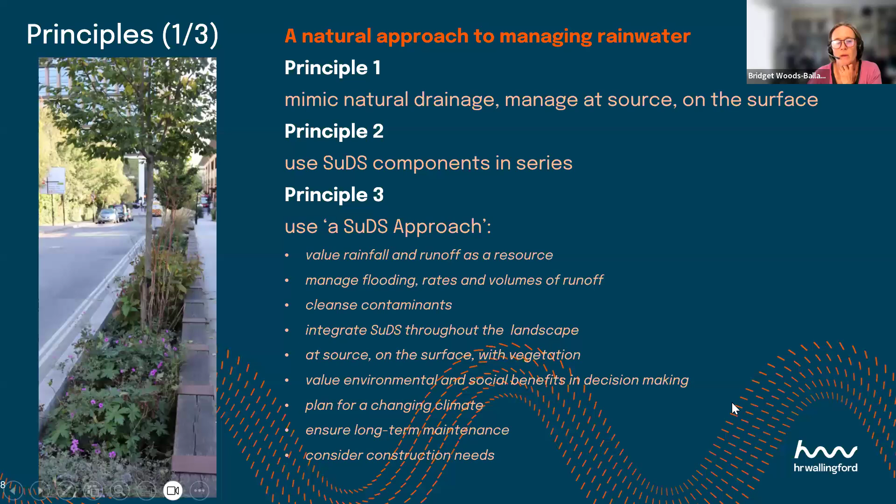The other further principles, again, they're quite overlapping, but ensuring surface water management is considered as early as possible in development design. It's integrated throughout the development and building design, that the scheme protects the environment, maximizes benefits. Again, all fairly similar. Making sure that you take account of existing flood risk policies.

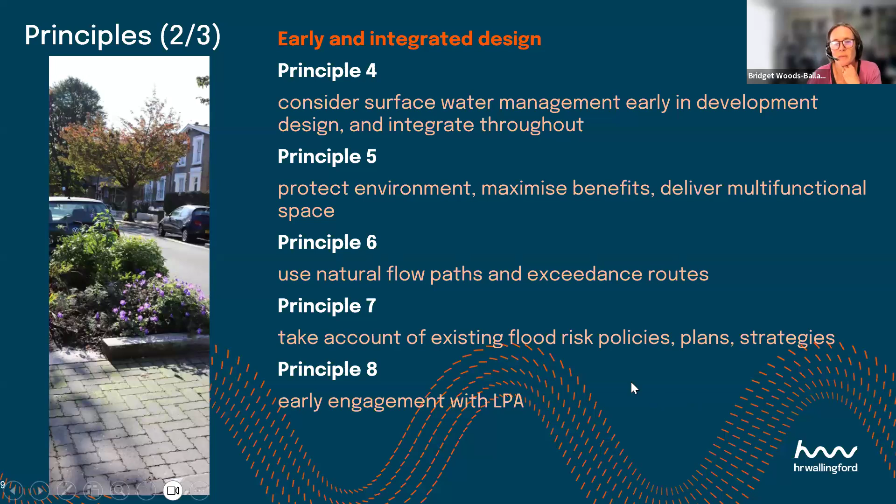So it's trying to get that integration between the flood risk assessment and flood risk management processes as part of development planning and the drainage and surface water management planning. And making sure that you demonstrate compliance as early as possible in the planning process, and then fully to secure planning approval.

So what are the standards? The first one is about runoff destinations, and prioritizing destinations that are going to ensure that you are valuing rainfall as far as possible. So the priority one, what you should consider first, is using the water wherever you can for non-potable use within buildings. Where that's not possible, or where you can't use it fully, then infiltration should be your next priority.

Then, if you are discharging off-site, you need to prioritise rivers, streams, lakes, other water bodies before you consider putting any runoff into an existing sewer. Because the recognition is that those sewers have a limited capacity, and that under climate change or urban growth, putting more water into the sewer is only going to add pressure and potentially cause flooding or pollution spills. And the combined sewer, which then has a risk of combined sewer overflows, is absolutely the lowest priority.

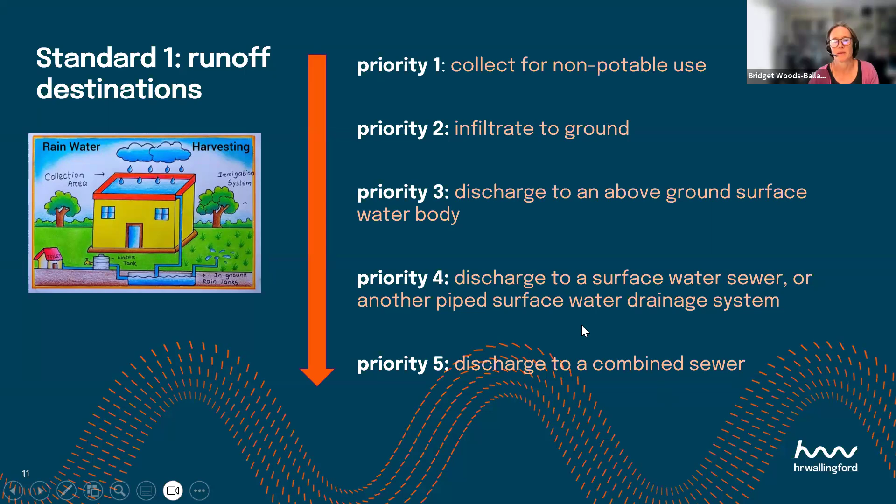Standard 2 is about managing everyday rainfall. Making sure that the first initial depth of rainfall is retained on the site. And I think this standard is going to be the standard that really drives the most fundamental change through SuDS delivery. It is only by putting in green or permeable surfaces on the site that you're going to be able to ensure that this initial depth of rainfall is retained.

An impervious surface draining to a pipe system and then into a tank is not going to deliver you this interception standard. And this graph just shows what we're really aiming for with interception. It shows two equivalent sites. The red line shows the response from a conventional drainage system, and the green line is the response from a SuDS drainage system.

So the blue lines are rainfall. So you've got probably 5-8 millimeters of rainfall happening before you get any runoff at all from your SuDS site, and it's very low volume and low flow rates. Conversely, the conventionally drained site, you'll get runoff immediately it rains, and that runoff will be peaky, will be high flow rates and high volumes, and that's what we're trying to avoid to make sure that we're not putting pressure

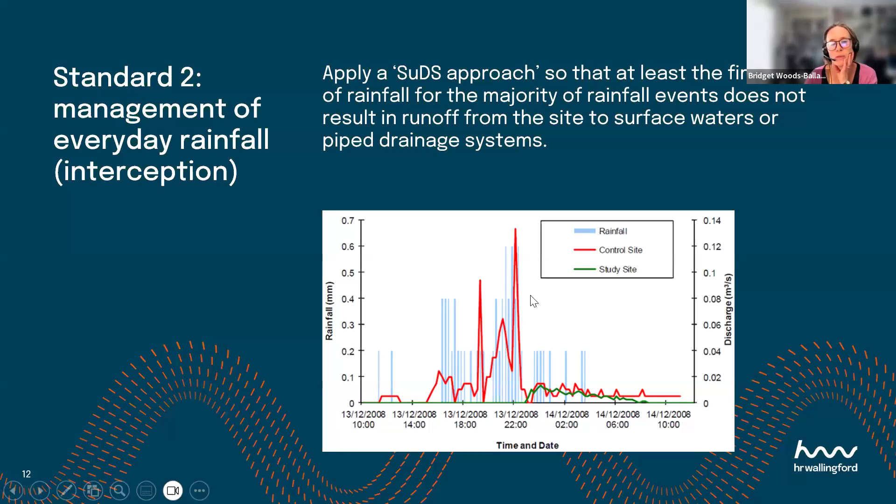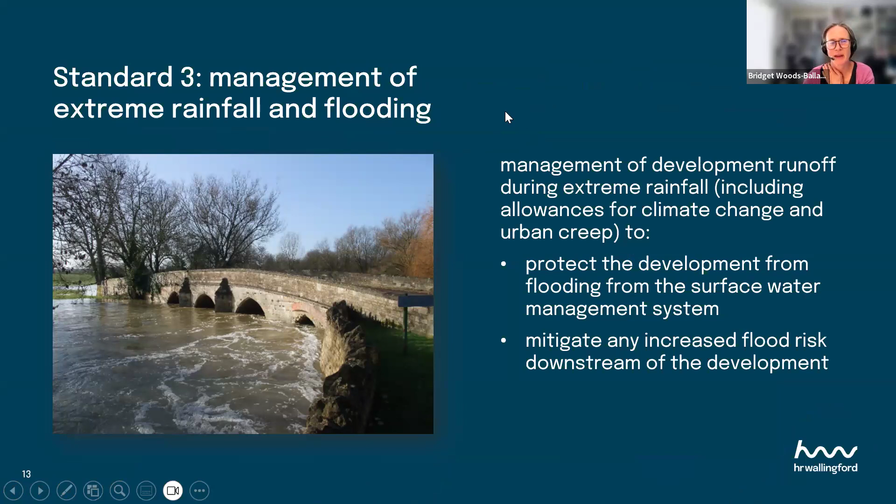on our watercourses. Standard 3 is about the standard hydraulics of managing extreme rainfall, making sure that you don't make things worse downstream, and making sure you adequately protect the properties on your development. So that really reflects the previous version of the non-statutory standards, with some small differences.

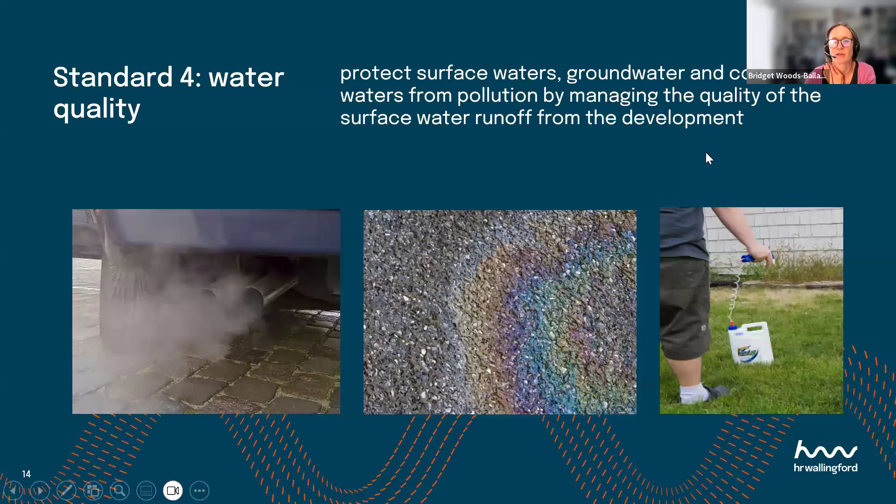Standard 4 is about managing water quality and protecting both surface waters and groundwater from pollution by making sure that you think about the quality of that surface water runoff depending on the type of land use you've got on your development, and that you put in the components that are going to trap contaminants and ideally provide some degradation of those and reduction of those contaminant levels before the water is discharged.

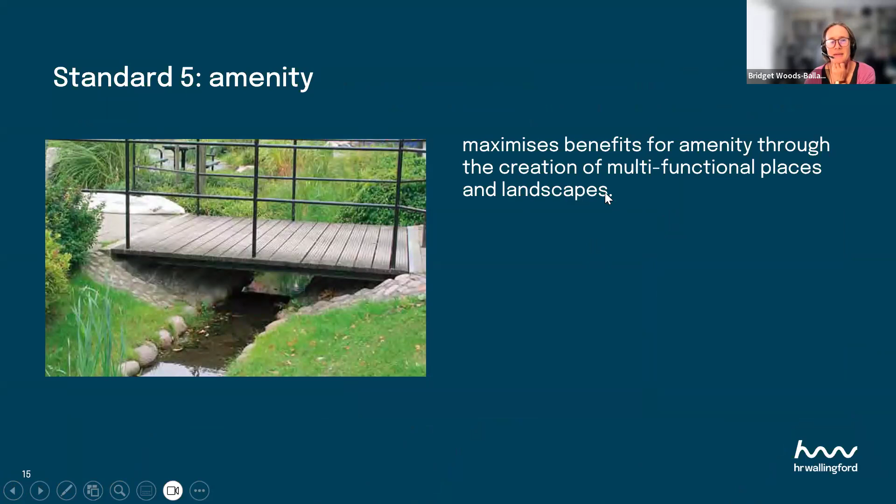Standard 5 is about using surface water systems to maximize benefits for amenity, and that really brings out the links in that creation of multifunctional space and landscape and place through the development. And Standard 6 is biodiversity in a similar way, making sure that your surface water management system is working hard for biodiversity, and in particular trying to maximize the opportunities for delivering biodiversity net gain on the site.

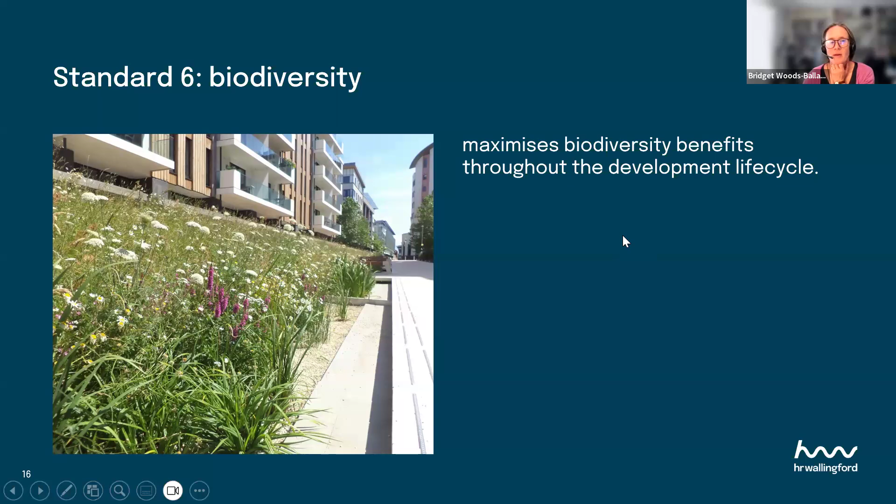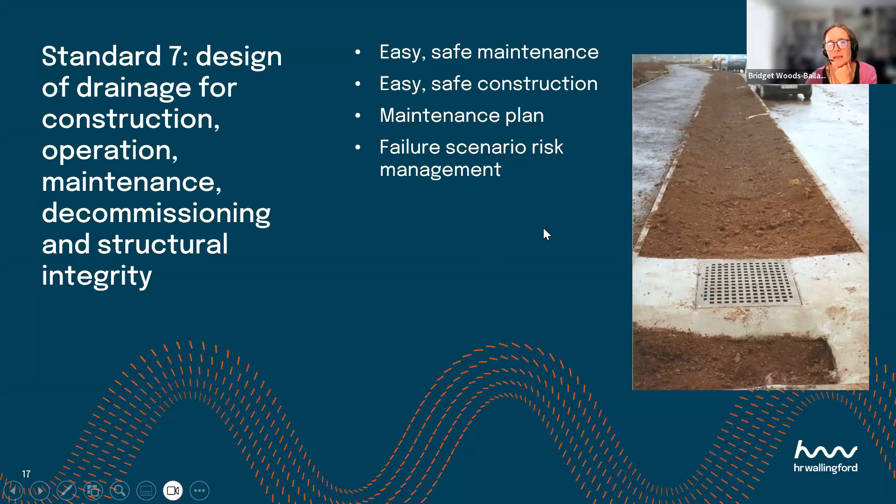And the last standard is about ensuring that any design that is conceived allows for easy, safe maintenance, easy and safe construction, that there is a robust maintenance plan, and that you've thought about what might happen if the system is exceeded, or if the design is exceeded, capacity is exceeded, or if there are failure scenarios like blockages at key locations.

So is it progress? Definitely, I'd say. Yep, we've definitely moved forwards. There's definitely lots of good things in there which should drive much better SuDS from where we've been to date. And I think that requirement for interception, that retention of 5 mil of rainfall on the site is really key and should drive that shift away from end of pipe solutions.

There's lots in there to promote rainwater harvesting, and I think we're in a position, particularly after this summer, probably, where people might start realising that the south of England in particular is very water stressed, and we're really not going to have enough water available to us within 20 years, even with our reservoir construction plans. It's raising the profile of quality, and amenity and biodiversity objectives, and trying to link surface water with the delivery of those.

I think one techie thing that's good that we put forward was that for previously developed sites, we used to be working on just improving from the previous situation, which still meant that redevelopment sites were allowing very, very high rates of runoff. And we're now talking about using a relaxed greenfield equivalent rate rather than betterment from existing. I think that will really help with those previously developed sites and make them more similar to a natural response.

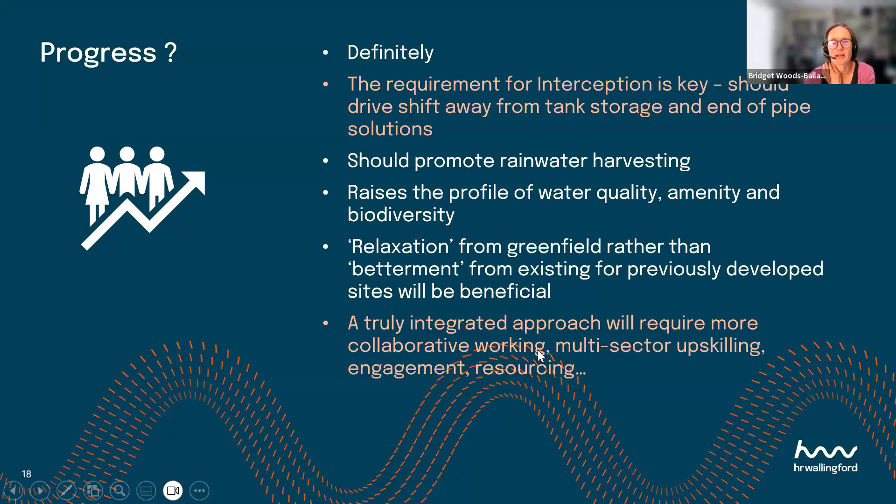There are a few question marks and challenges. There are a few sentences that are slightly odd. "Only applies to the management of surface water runoff that is essentially uncontaminated." Well, I'd say all surface water runoff is contaminated to some extent. It talks about using proprietary measures for large car parks, which I definitely disagree with. So I think we've got to thresh through what that actually means and make sure that's not a sort of

escape route. There's talk of a 1 in 1 or greater chance of events happening each month. That's something new. I don't know. I think it's a bit challenging thinking about how to interpret that. Greenfield runoff rates is the big one, shall be estimated using EA's flood estimation guidelines. Those are quite complicated guidelines, and I think there's going to be challenges there if we're not going to use just the simple methods that we've used to date.

Very negative, there's no removal of this automatic right to connect to water industry sewers, and there's no guarantee of long-term maintenance and funding, and that's a function of the fact that the legislation hasn't been implemented. Okay, so that's a quick skim through of the new standards and the ups and the downs of those, and I'm going to hand over to Adrian to talk about the new guidance that's going to help and support people with navigating these. Thanks. Thank you, Bridget.

Yeah, indeed, it's a great transition actually, because as you pointed out, there's a greater need for collaboration and for highlighting good practice and how to achieve those new standards. So the rainwater management platform, I just wanted to give you a quick overview of what it is. First of all, I will start with the logos on top of the screen. The one on the left is the Ofwat Innovation Fund. So we were successful in a grant bid proposal a couple of months ago. And so we are absolutely thrilled that we are funded by Ofwat to carry on and build this rainwater management platform.

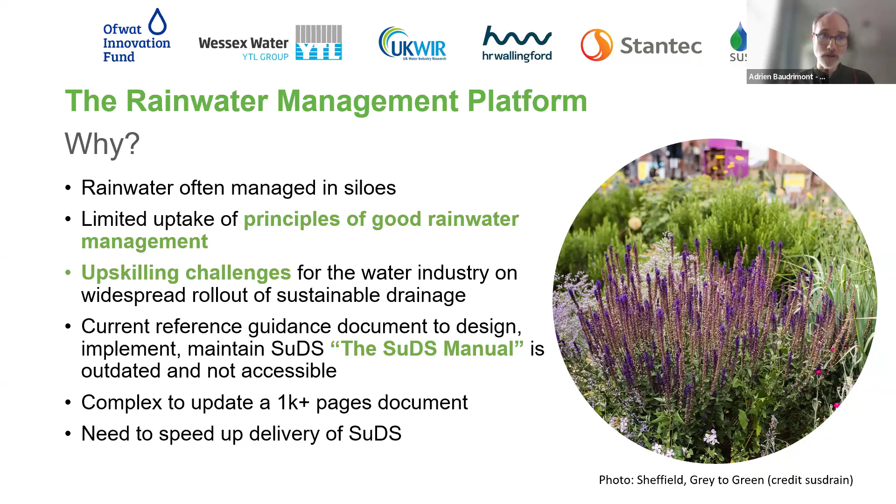Then we've been wanting to do this update of the SuDS Manual, which is today the main document that has all the information on SuDS, for a good number of years now. But this is not an easy task because of the sheer volume of this document. It's a static 1,000-page document. And just to do this one big update is something that requires a lot of resources. And we don't really have the time to slow down on the process of updating guidance because we need to implement those SuDS as fast as possible. Next slide, please.

What is our vision? So we really want to unlock rainwater management and SuDS. And that's why when we put our heads together and drafted this bid, we're like, okay, let's change completely the SuDS Manual as it exists now, and let's transform it into a platform which will be free and accessible for all. And that is not a static document. It's not either a searchable PDF. It's way more than that. We want it to be interactive. We want it to be online and accessible to a wide variety of users, including not only the drainage engineers or all the stakeholders already involved with the design, delivery and maintenance of SuDS, but also reaching out to a new audience, the homeowners, when we incorporate the rainwater harvesting dimension of it.

And then we want to make it a tool for the next century, right? So something that really takes advantage of an online format. So bringing videos, making the linkage between the different components and the different research within the tool with existing case studies, being able to gather all that and to deliver it to the user in a very effective way.

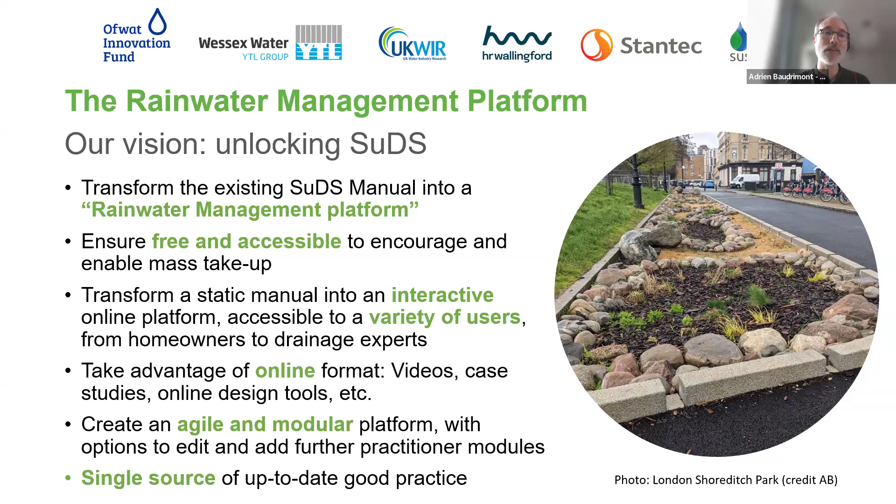And so we can not only do it in small bites, but also we can test it along the way, and then we can change it as needed based on user feedback. And the goal is, of course, a single source for everything SuDS. Now,

obviously, the SuDS Manual is very drainage focused, but the rainwater management platform incorporates a philosophical shift with regard to rainwater. And this shift has been ongoing for quite some years now. And at susdrain, the community of practice for sustainable drainage, we see that evolving every year through our SuDS awards,

and more we see the property level SuDS and the school level SuDS and all those that really are on site and are really capturing the water where it falls, maybe smaller devices, but really taking this water and using it as much as possible. And we see those increasing more and more, which is very encouraging.

So from rainwater as a waste, instead of trying to get it out as soon as possible, to pipe it in, when speed is the priority, we want to change these. And also the early vision to see this rainwater as waste is also about keeping it outside of property lines, and then not taking the benefits that it can bring on the site that it falls, but shifting it and moving it further away.

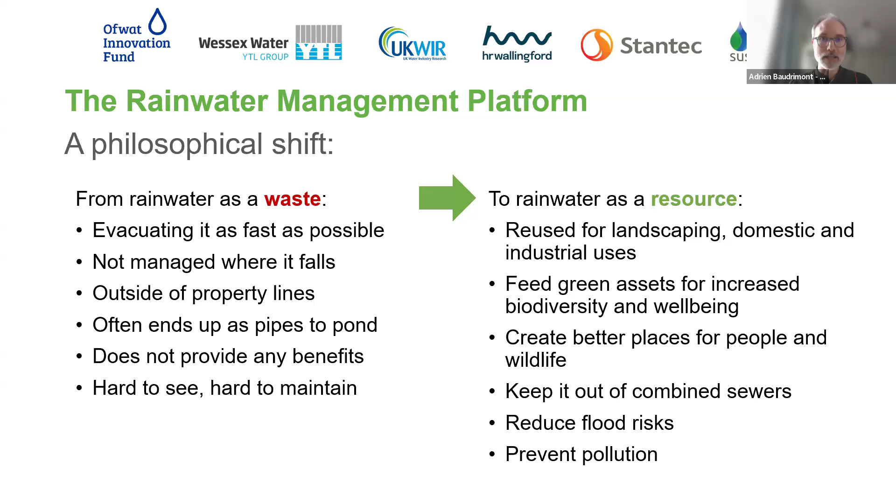Okay, we are building this update of the SuDS manual and also the transformation into this rainwater management platform on several things that have occurred in the past couple of years. First of all, new context, new policy, and new drivers. Bridget presented on the new national SuDS standards. So definitely we want to keep those in mind. There's a lot in there that echoes what we are planning to do with this rainwater management platform, with the hierarchy, for example. So it's definitely something that we want to put in.

The last iteration of the SuDS manual was back in 2015, 2016. And it's been a few years in the making, which means that what we have in the guidance now is, you know, a bit dated. So we want to take this opportunity to bring in the lessons learned from key projects.

Not only the big ones, like the big retrofitting schemes that we've seen these past years, like Mansfield, for example, or Grey to Green, or Greener Grangetown, but also learn from the smaller schemes, the small retrofit schemes that were a big success, but driven with maybe not as large a budget. And so we want to really learn from all those and put the lessons into this new tool.

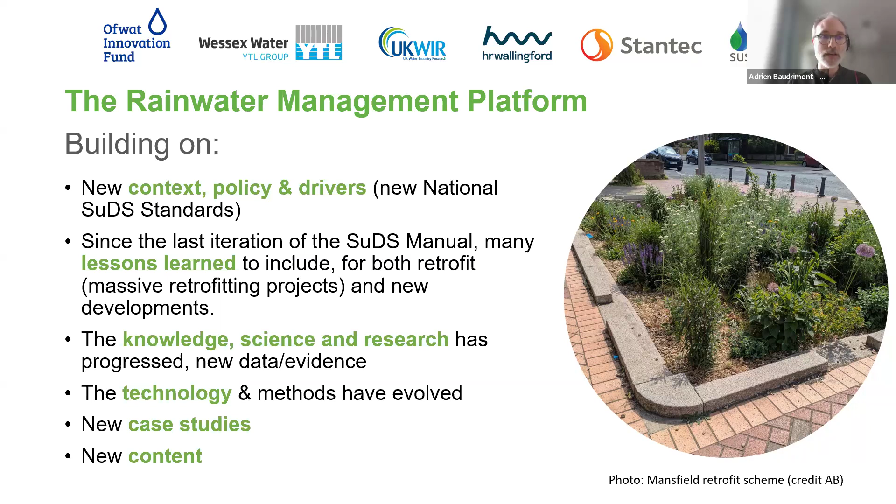The knowledge, science, and research has also progressed. There's a lot of new guidance that has been published since then, not only from CIRIA, but also from many other organizations. So we want to make sure that this new knowledge is taken into account and incorporated into the content that will be hosted on the rainwater management platform. And of course, in recent years, more and more case studies have come in. This is just shown through the SuDS Awards entries that we get every year.

And every year we see incredible projects that we can definitely learn from. We've also identified some new content that did not exist in the previous SuDS manual, or that existed in a different way, but we want to either update or bring in new focus in these areas that you see on screen here. So, for example, use of recycled material, carbon is a big one, community maintenance, the asset management side of things, the smart technology, etc.

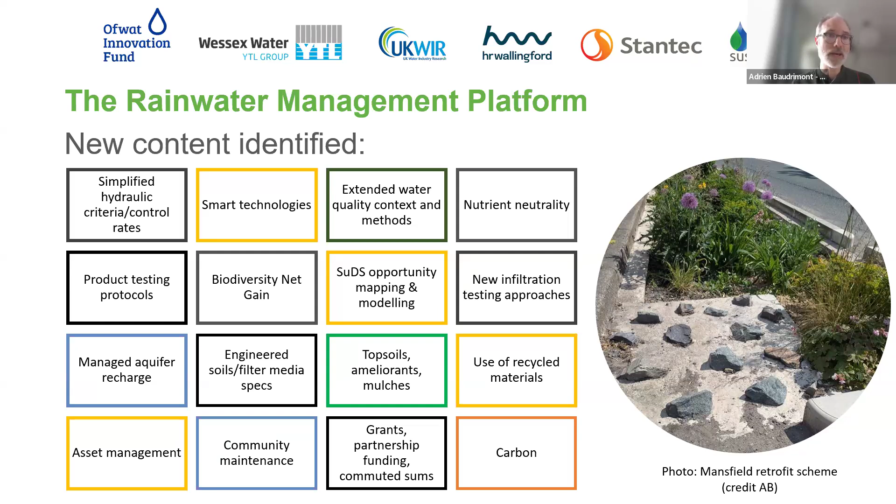You will see as well biodiversity net gain in there. As I mentioned, it's a key driver: whenever a stakeholder starts on its journey to designing either a retrofit scheme or a new build development, BNG, if it's in England, is probably on the horizon. And BNG and SuDS can play a big role in how we manage the rainwater where it falls.

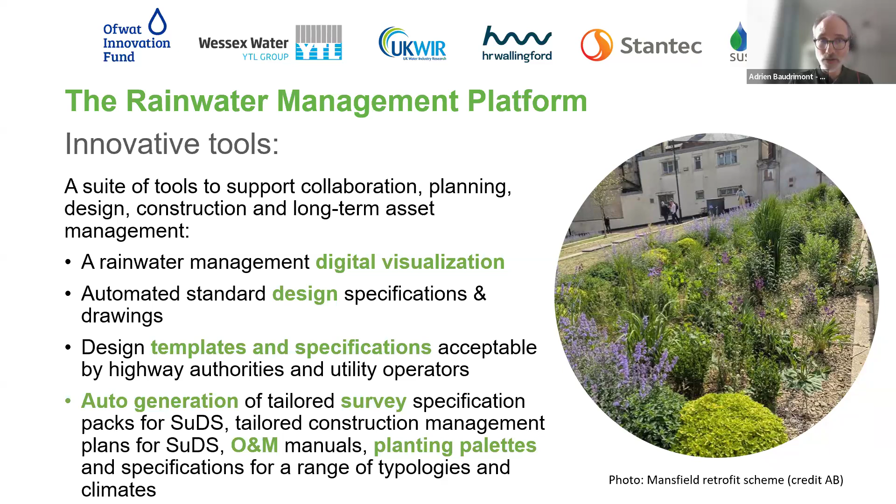The next 3 slides are part of the bid that we submitted, and this is just a bit more of a visual conveying of what I just mentioned earlier on. So a one-stop digital resource for all, transforming this manual, adding all these new bits, new context and policies, knowledge and research, technologies and best practice into a new platform that incorporates guidance, standards, and tools.

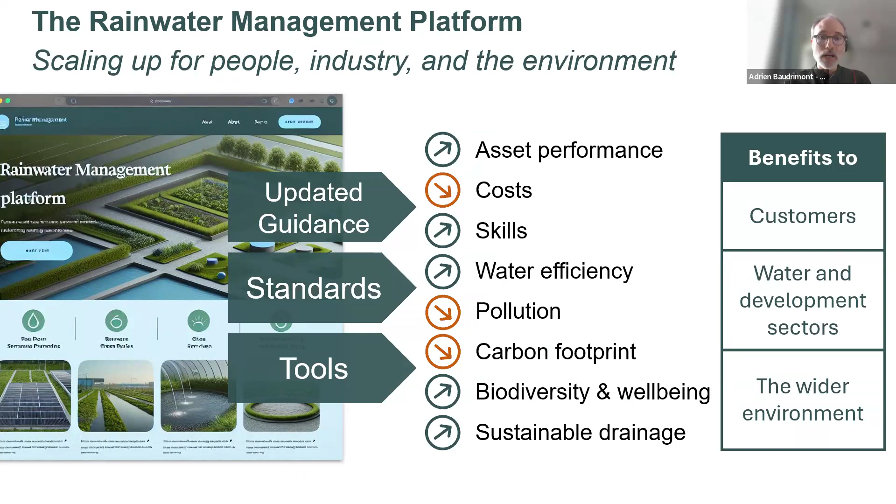Next one. And then lastly, I just want to highlight that this tool is built to evolve. So once we deliver, it's not going to be static at all. It's going to be open to grow with either add-ons or with just refinements.

We want to step away from this really hard update cycle where every 10 years we have to pull in a massive amount of resources to do one big release, one big update of one document. Instead, we want to be able to update maybe per topic or whenever there are key new regulations or new standards or whatever it is.

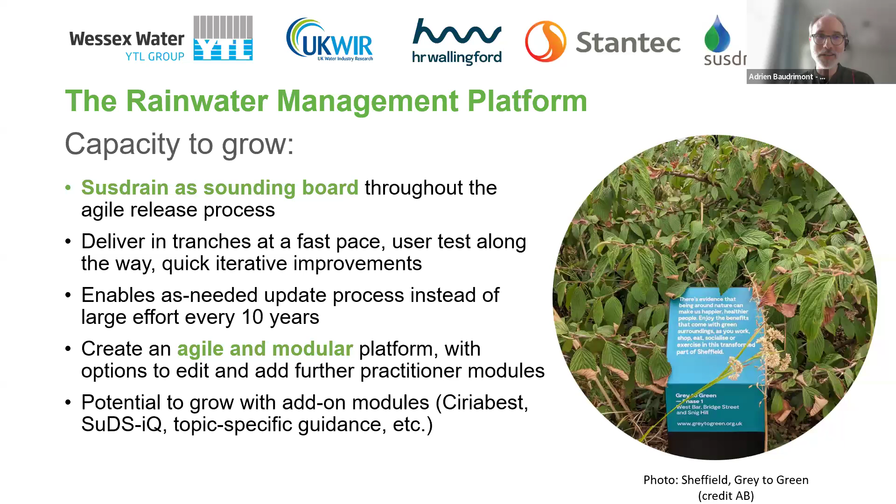There's also the opportunity to add on other tools like CIRIA BeST, which is our benefits estimation tool, but also SuDS-iQ, which I think transitions perfectly to the third part of this presentation.

Thank you so much. Thanks, Adrien.

Yeah, okay, so very quickly, SuDS-iQ is another Ofwat Innovation Fund project. It was actually funded last year, the previous round of funding. And the vision for this is taking what HR Wallingford have been developing under our UK SuDS web platform and putting it into a much bigger platform that allows users to compare different SuDS options and understand how they work, how they perform.

It will allow those involved with planning, designing and approving SuDS to get an idea of whether proposed SuDS are likely to be compliant with different criteria without stakeholders needing very costly, complex modelling tools that they may not understand.

Providing a platform for users so that different stakeholders can all share access to the same scheme tools, the scheme representations, so that they can share SuDS ideas, proposals and options with those people that they're collaborating with and see how different options might work or might give a different standard of performance.

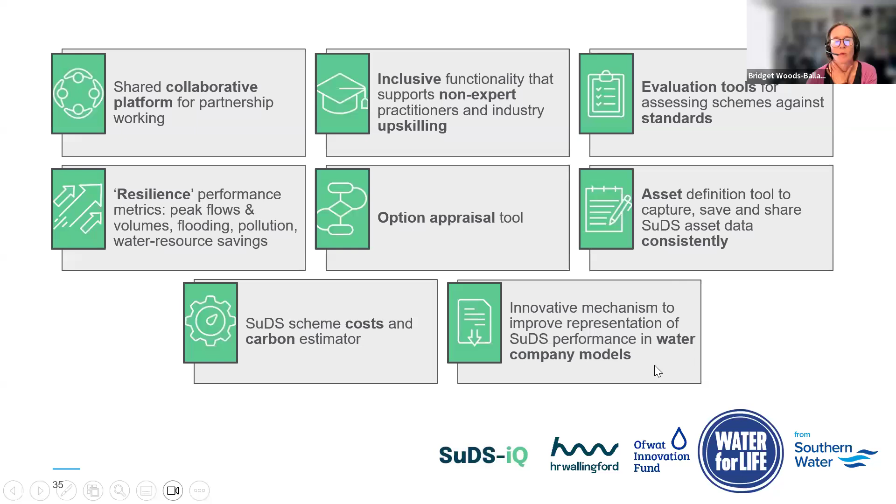We wanted to build in a SuDS costing and whole life costing calculator and a carbon estimator of different schemes, and also potentially use the tools that we're building to enhance or speed the capability of water company models, so more detailed drainage models to represent SuDS.

So the platform steps that we envisage, and we are currently at the beginning of building this tool, is creating a project, defining your site, your locations, all the different constraints and opportunities there might be on a site, developing the scheme, looking at the site layout, the development layout, where the site drains to, and what objectives you have for your scheme, whether that be retrofit or new build.

I say SuDS modeling, but yes, it's simplified modeling that allows you to see how a proposed solution might work. So that will help you select and size SuDS components that are going to manage specific extreme events, and then supporting that collaboration functionality so that different stakeholders can all access it and see what's being proposed and see how that scheme might work, and then being able to generate outputs, potentially including drainage proformas, meeting the needs of SuDS approving bodies, and evaluating whether it's complying with standards.

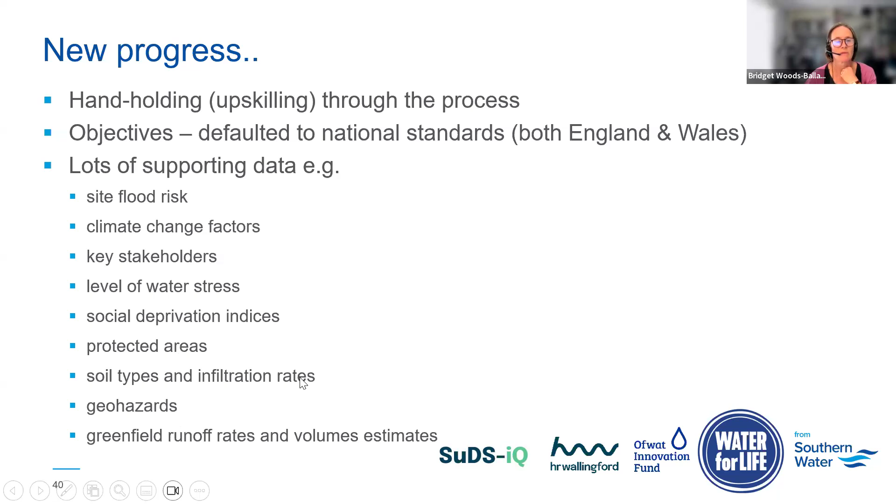And then you'll be able to define your building types, your roads, your green space, your car parks, and that will allow us to work out what runoff is going to come off these surfaces and give you an estimate of how much storage you're going to need on your development site.

So after you've defined your development site, it will give you some guidance on possible SuDS suitability and options, and an initial estimate of how much storage you might need across your site, and then you'll build and test your SuDS scheme.

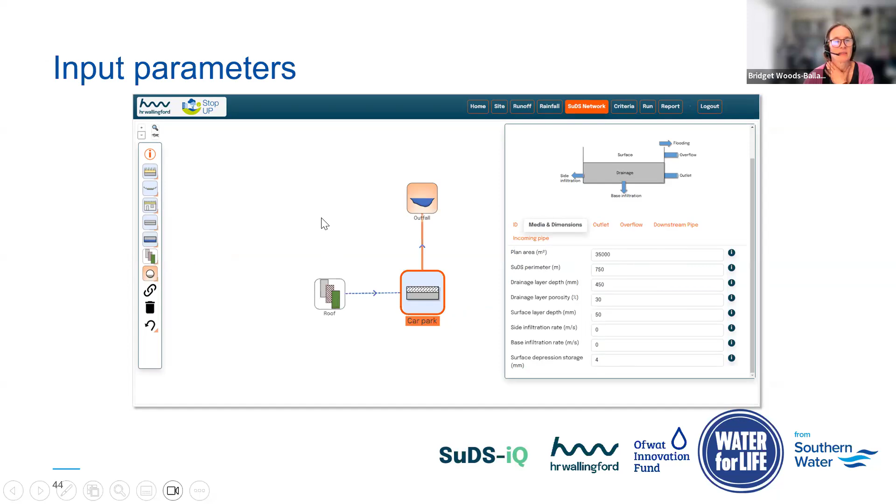So this will give you a really simple way of just clicking on SuDS components, of linking SuDS components together to an outfall, and then putting in different parameters for how big your pavement is, how deep it might be, whether you're going to put gravel underneath it, these sorts of materials, and lots of these fields will be pre-filled in, so you will only flag the ones that are really crucial for you to consider.

But the key ones are obviously going to be peak flow. What are the peak flow rates? Does it comply with the standards? How much flooding is occurring from either the whole drainage system or from different components, and what that flooding might look like and the implications there might be.

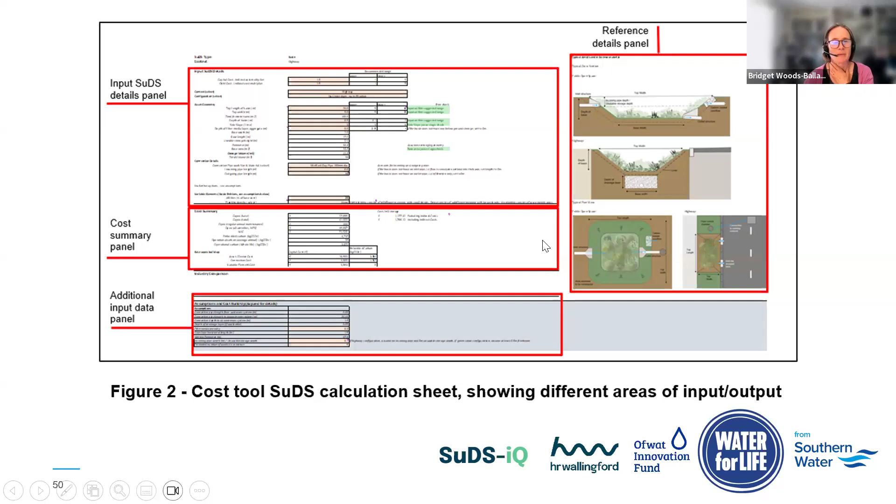Aqua built a cost and carbon tool for SuDS, and so we're going to bring that tool into SuDS-iQ, so that when you're building up your SuDS, you can get that initial first estimate. And we're also going to bring in a maintenance calculator as a cost estimator as well. And this is what the Aqua tool currently looks like in terms of building up SuDS components and then putting a cost on it. But as I say, we're doing this already in SuDS-iQ, so we're going to be able to come up with a cost very easily.